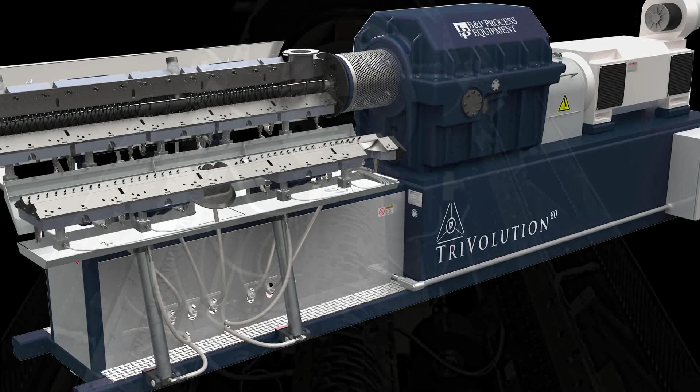My name is Brian Fritz. I am an engineering supervisor with B&P Process Equipment, located in Saginaw, Michigan. We make different types of mixing and separation equipment for the chemical processing industry.

With our company and the equipment that we design, we have mostly mechanical engineers actually designing our equipment. We are a very engineering heavy company. Nearly all of our departments are actually run by engineers.

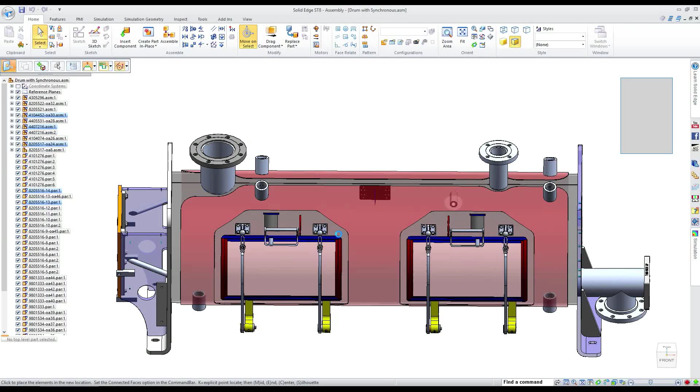We've been able to use Solid Edge to bring in some of our SolidWorks data, and hopefully we will be able to continue to seamlessly use the legacy data that we've developed from SolidWorks and manipulate it in Synchronous technology quickly and efficiently for new projects going forward.

We're just now learning that we can bring in our SolidWorks files, or any other dumb solid from any other CAD system, and manipulate it, recognize some of the features within it, and turn a dumb solid into a more intelligent solid that can be manipulated and easily adjusted and modified to the new design that we need for our machines.

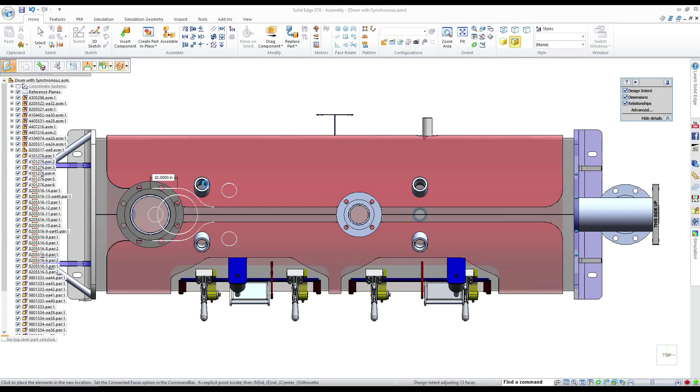Where we want to be able to design a component and have a little bit more structure behind the build of it, and going back to adjust some of these complicated geometries, we can still maintain those in order. But for 80% of the components that aren't so complicated, Synchronous can really cut the time in half or more required in order to develop those components.

As far as migrating data, I've found that there's two good ways to do it. You can just take Solid Edge, change the file type, and open up the components, and it'll automatically translate that data for you and make it somewhat seamless.

The other way, if you've got a lot of components and you want to do it as a big batch, and do it all at once rather than opening file by file, you can use the migration tool to go from Pro-E or AutoCAD or SolidWorks and select a bunch of batch files that you want.

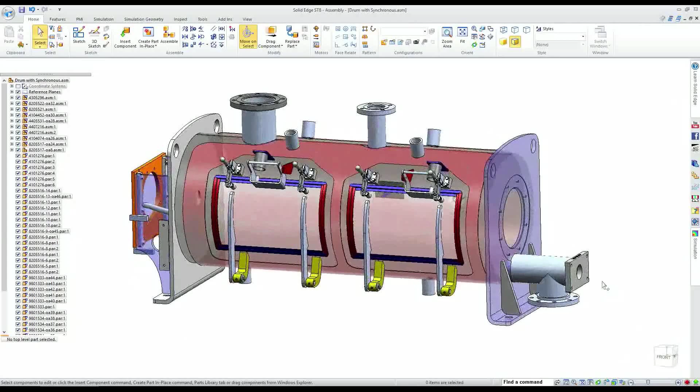I'm Scott Sanborn, Senior Mechanical Design Engineer. I started AutoCAD version 13 in college. When I first got into designing equipment in the industry is when I was first introduced to SolidWorks, and I've been a SolidWorks user since 97, SolidWorks 97, up to their current release.

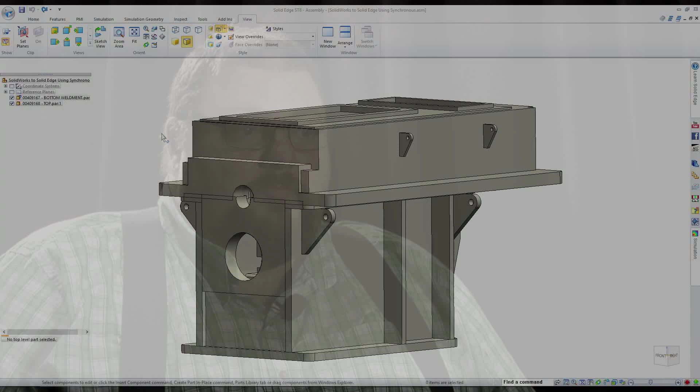Synchronous technology is wonderful. It was a complete shift in my way of thinking. It was quite a revelation to me to find that switching to Solid Edge was really going to be advantageous to our company, and the more I got to use the product, the more I felt like I don't need to worry about it slowing me down. It's going to speed me up, so I'm not worried about losing my Top Gun status as a SolidWorks user. I feel like I'll be right where I need to be with the new software.

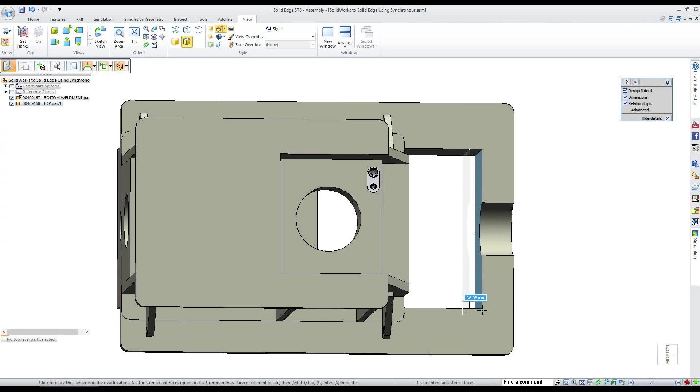I would say that when you've been dealing with a particular software company, in my case SolidWorks, for years and years and years, you can develop an almost religious devotion to it. And if you really say to yourself, be truthful, be objective, maybe you'll be surprised with Solid Edge.